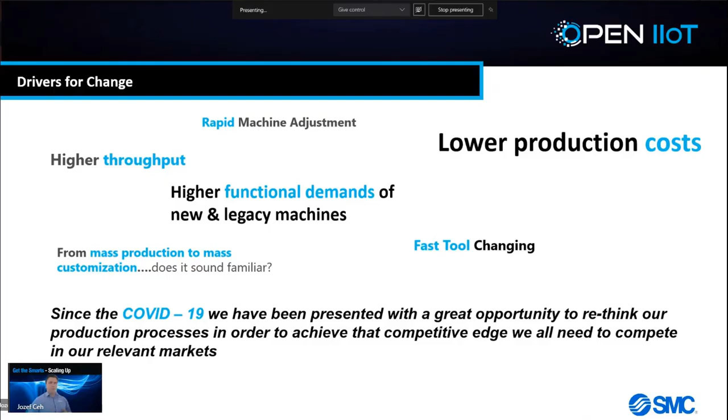So the possibilities of smart factories are almost endless, and that can be a wonderful thing, but it can also be cumbersome and almost harrowing for a lot of people, not knowing where to start and what part of the process to consider. When we don't have boundaries or a structure around a process like this, it's difficult to quantify.

Perhaps we can't quantify it from a technology perspective. We may not be able to quantify the financial investment, resources, or time invested. And we all know nobody likes to write open checks, especially not these days. But yes, it is possible to hold a factory in the palm of your hand and be able to retool the machinery at the push of a button.

But it's really important to understand that this is not the start of the process - this is the end result of the journey. We need to keep that in mind. There are many aspects along that journey, and many stops along the way, that get us to that point.

So moving across, in saying that, perhaps we've found enough reasons to start this journey. Perhaps we have already had enough reasons, or you may want to consider that now. But where do we start?

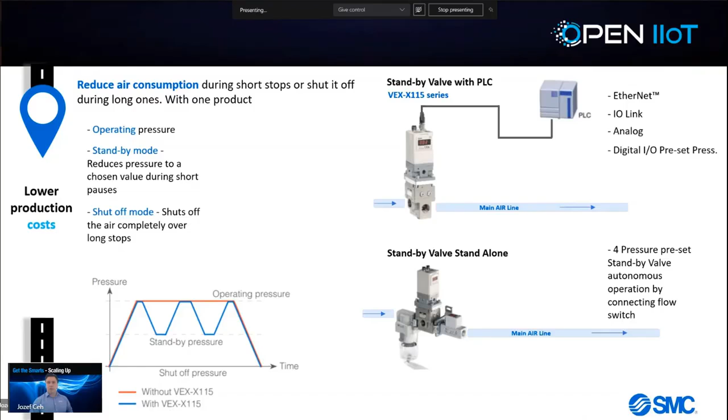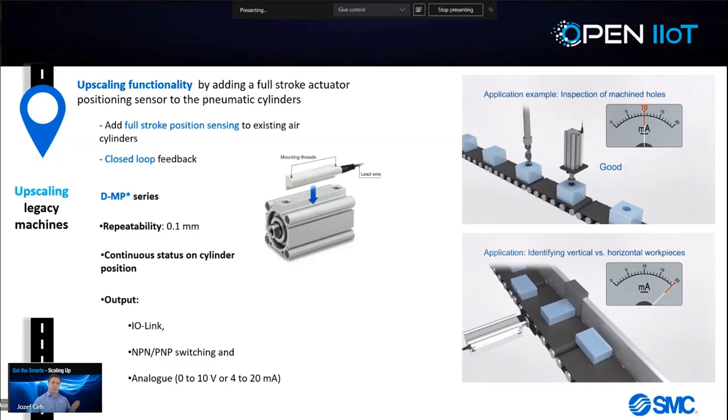Another solution takes the actuators even further. What if we added a higher degree of control to our cylinders and actuators, like controlling speed, force, and acceleration? In the previous example, all we know is where the actuator is. Well, with this, they can speed up the cycle time on the machine by not having the pneumatic cylinder go all the way back before starting the next part of the process, because we know it's safe to do so and it's out of the way. So we may be able to shave one or two seconds off the process.

Going to that next step up, we add further functionality by controlling speed, force, and position. We could do that in the same way, controlling the valve just as we control the cylinder, simply by flicking on-off switches, without adding further complexity to the machine, and still achieve a lot more. One option is electric cylinders, a simple product that we can apply almost immediately to upgrade part of the process.

This is where rapid machine adjustment comes in. We can repurpose our machines to accommodate multiple different products almost immediately without adding complexity to our PLC process. It may be a matter of replacing some simple actuators to add further functionality, storing step data within the driver itself and selecting through on-off switching, or perhaps we already have a network on the machine that we can integrate into. So, another option to explore.

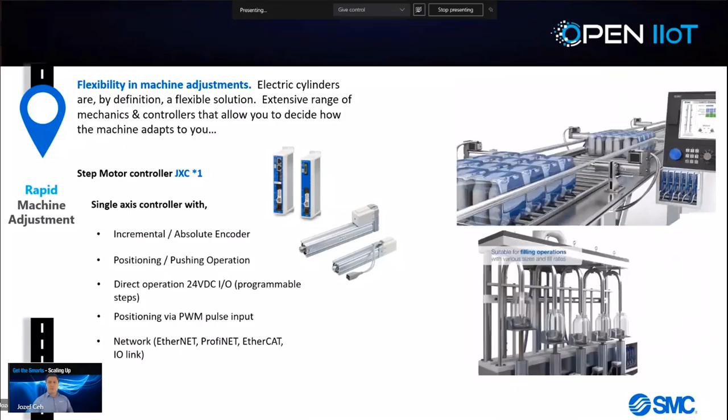Adjusting conveyors for multiple products, potentially filling systems where we can adjust for various size jars or shapes of a jar, viscosity of the fluid where we can use speed to adapt to the viscosity of the fluid and control the filling systems.

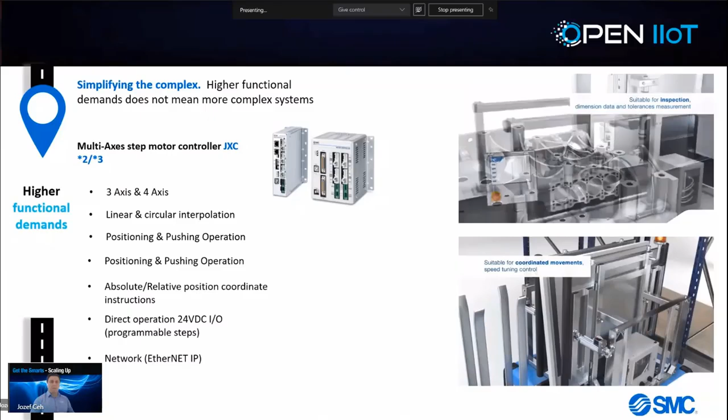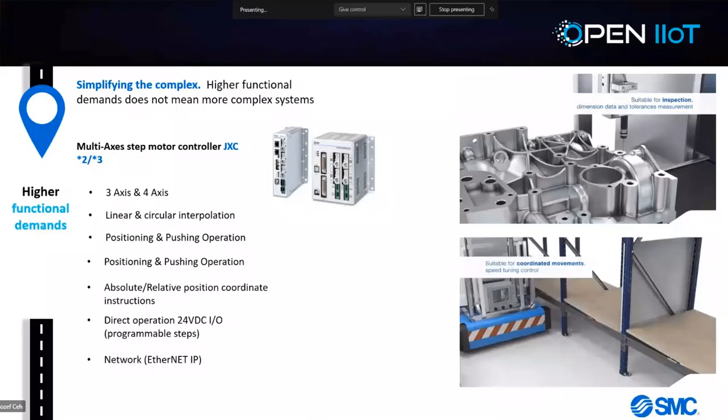We can go even further than that. Looking at it, we're still using basic principles and applying basic technology and controls, as in the previous examples. We can add further functionality to our machinery where we can coordinate some axes, where traditionally coordinating axes requires high-end PLCs or dedicated PLC motion cards and probably quite a lot of knowledge in programming as well.

Having a simple system like the JXC2 and 3 options, we can coordinate axes and have the smarts handled by the driver itself. We can still select that type of motion with a simple on-off switching output from a basic source - that could even be push buttons, or a relay output on a basic PLC, or we can integrate a network such as Ethernet IP or EtherCAT or others.

So coordinating axes, where can that come in quite handy? Well, it certainly comes in handy with palletizing applications, where it could be as simple as Cartesian axes or palletizing in a certain pattern.

It could be inspecting parts, like in the top right-hand corner, where what we need to do is a QA check or inspect with a laser sensor to ensure the parameters are correct on a machined part.

Or we can also apply glue to the interior of a car part that needs to go in an irregular pattern. These are very flexible solutions that are built in natively to a system like this, where it doesn't require any specific or high-end knowledge, and it allows for rapid deployment as well.

It could be even synchronizing 4 axes, as we see in the bottom right-hand corner, for autonomously transporting parts and shelving them where stability is required and an equal amount of force is required on 4 different corners, applied at the same time with the same movement.

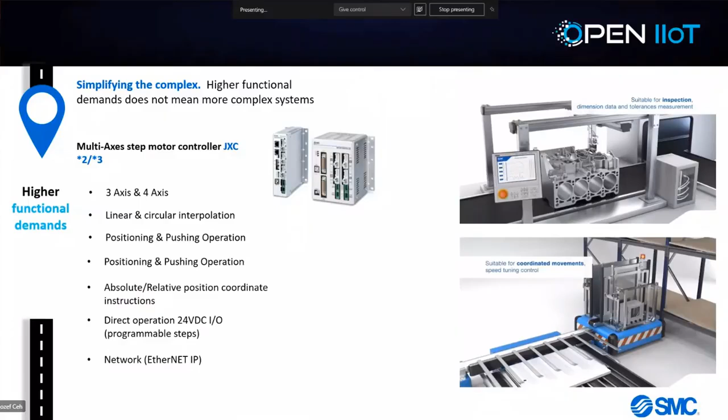Stepping across to another side of the factory, it's been estimated that a lot of downtime in robotics is usually caused by broken communication cables. We've all seen robots in operation, the multi-axis movements or quite complex movements where robots are deployed to perform, and they're deployed for that very reason. But perhaps if we could give them a lot more

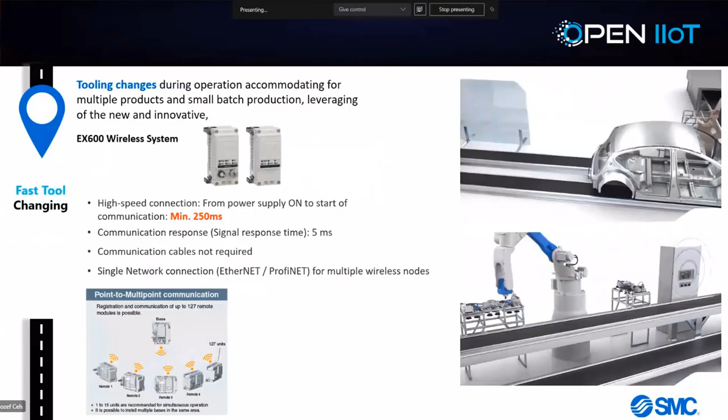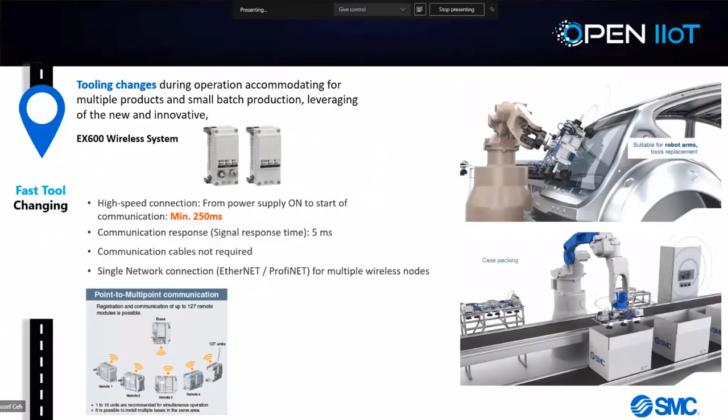freedom in movement by removing some communication wires - that's exactly what is available. We can reduce some downtime on robotics by putting in wireless communication I/O modules that can communicate to a master in a control cabinet, removing at least one extra wire of the communication line. What this could do is improve perhaps the speed of the packaging, or let us move in a direction we weren't able to move because we were tied to one specific wire.

What it also does is allow a single point of connection with the master module to a PLC that, for example, may have only one Ethernet or one ProfiNET connection available. We can set up multiple wireless subnetwork modules that correspond to the one master without adding further programming to the PLC.

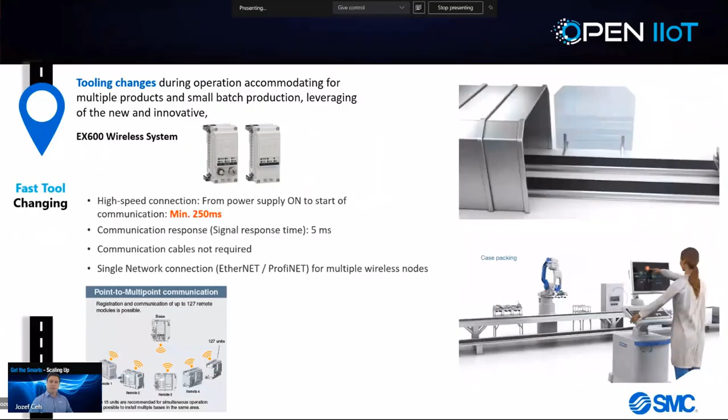Where that's particularly useful is also with tool changing. As we can see in both applications running on screen at the moment, often we need to change tooling to be able to handle different products in the same, or at that part of the, process.

Where that can happen quite quickly is by being able to have multiple wireless modules connected to tooling equipment. On power up and reconnection, approximately 250 milliseconds or even less at times it takes to power up, and it's back in full production and online and available.

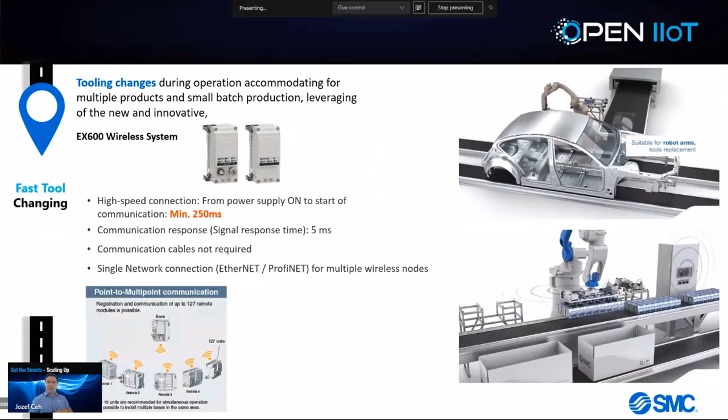So another way where we can add further flexibility to our factory and potentially reduce downtime in broken wires and diagnostics. So having said that, we've seen a few different applications where possibilities, we could open up almost immediate possibilities, and it didn't require anything specific or overly technically intensive or involved.

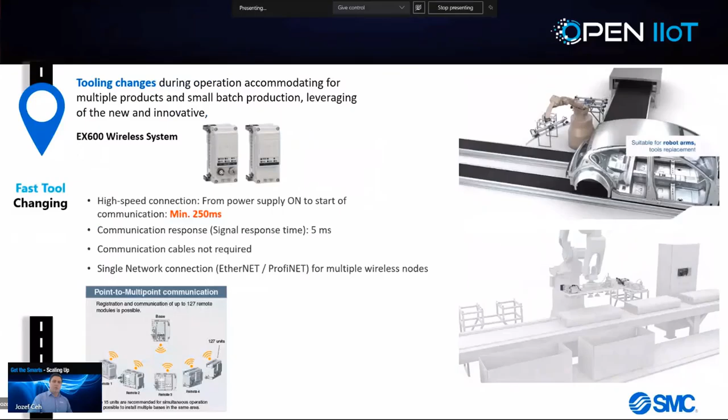So reviewing quickly on this slide, where to from here? What we started was building an infrastructure. We start on one part of the process or one section of the machine where we've taken one direction, whether that be to save compressed air or reduce compressed air usage by lowering pressure during standstill or standby, diverting that air to another section of the machine, which in turn stops the compressor kicking in continuously and having to run overtime.

Where we are looking at upgrading high-end functionality using simple electric cylinders with slightly more capable drivers that can perform what previously used to be quite complex tasks very simply at our end as well.

We can upgrade very simple air cylinders as well by adding smarts to that cylinder, like electronic full stroke sensors and also electronic regulators that can control the force of the cylinder very dynamically in coordination with the sensor. And we've also seen wireless systems that can remove wires and allow systems to move freely. Those systems are usually robotics or turntables, stretch wrapping systems, etc.

So where to from here, and what are the further benefits that we unlock? Having this type of equipment implemented, at this point, we haven't connected to anything other than the actual functional part of the process. Now, what we have achieved is an improvement in the process.

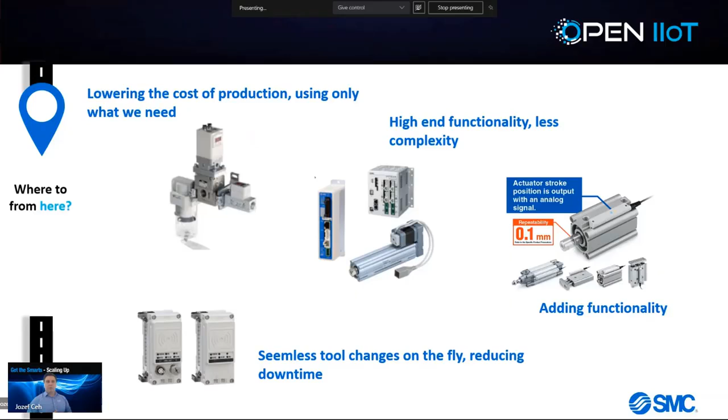So we don't want to stop here. Yes, we have made immediate improvements, and there are immediate instant rewards there that we can start applying, but we don't want to stop here on the journey. So what's the next stop?

Well, the next stop is to create a scalable platform. So once we start deploying these systems — these IO systems, whether that be sensors, actuators, or smartening up our legacy machines — what we want to do is start integrating into a common platform. Now, that common platform could be like an EX600 system, which helps to facilitate an ecosystem that grows with your automation requirements.

Now, flexible — which is why we refer to smart flexibilities — we can upgrade at any time. We can add a functional module to this system as the requirement does arise. So once we've preset all the infrastructure and the actuators and the IO system below that, we can start integrating.

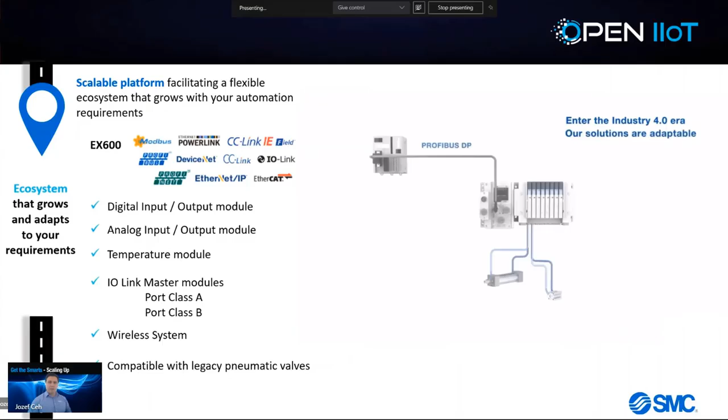We can start integrating via IO link to the system. We can upgrade a certain part if we're at that point with the budget, or the next round of upgrades allows for that type of implementation. Or we can simply continue by wiring it through an analog IO system or a digital system and find one output or one part of that system that can give us a little bit of diagnostics or feedback that might be critical to the system until we are ready to upgrade further.

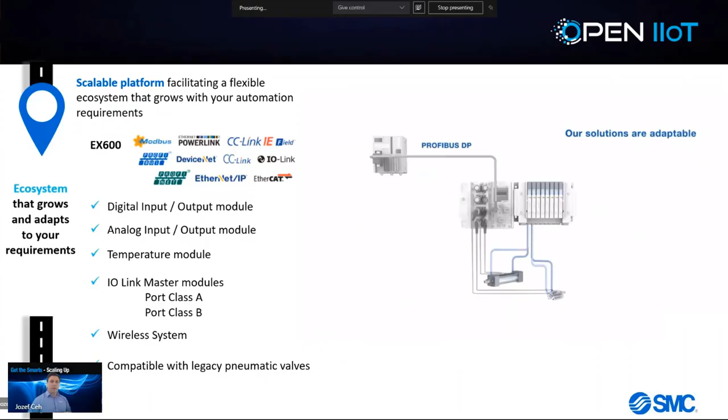So a lot of flexibility exists, and you can see by the vast amount of communication networks that a scalable platform like the EX600 can connect to as well. It does allow us to utilize the existing equipment that we've potentially diagnosed in our second step of digital assessment, to accommodate for that extra spare capacity that we have. So we don't have to replace everything on the machine.

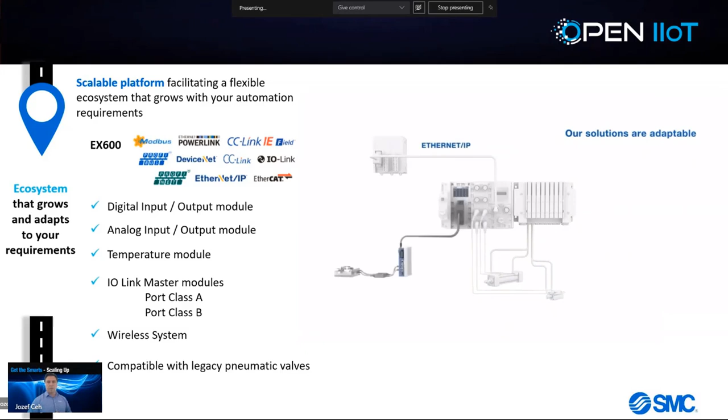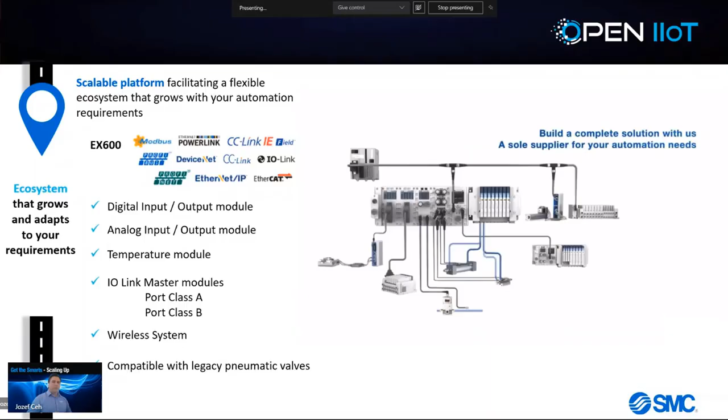Having said that, and starting to head down scalable systems as such, ultimately that's going to lead to the overview where we want to go, which is the gentleman holding the iPad, potentially from the top floor, being able to adjust his whole factory. So ultimately it leads to smart factories. And this is what smart factories look like.

When we start having interaction with multiple parts of that factory or multiple parts of the process, by being able to understand what's happening through streaming data, having full duplex communication - that means being able to send data to individual equipment right down to the sensor level, and being able to interrogate data from each sensor, actuator, or processor on that line - that starts giving us a lot more flexibility.

One of the great quotes I've seen is that being able to refer to real-time data, other than quarterly management reports, certainly makes a significant valuable insight to decision making. So having that data on hand right now certainly gives us a lot more ability to respond to a live system as such.

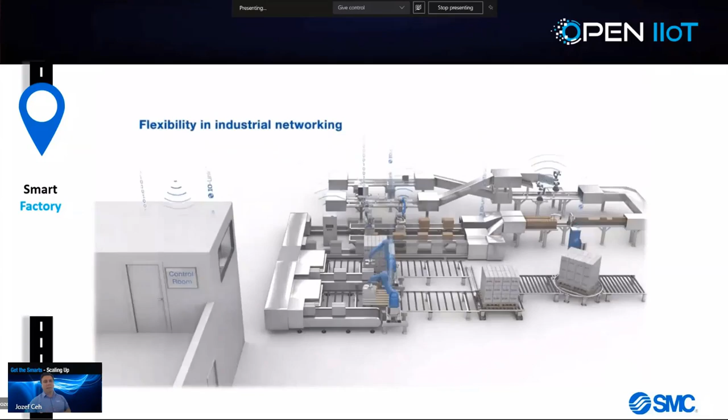So with that, we'll pretty much complete our journey on the next step. The summary and key points we've explored: start somewhere. We need to start somewhere. The key is to take small steps, make it achievable, within the budget, within our capability.

Follow the process, lay out the process into 4 steps in digitalization. Be clear on what we're trying to achieve, how we're going to do that, what we currently have, and who we have around us to support - the project management team, the timelines and budgets - and let's get a little bit better every single day. So ultimately, that's the key points in summary.

So the last slide, we're finishing, and we'll go to our Q&A. I'm not sure how we're going for time, Nick.

Yeah, I think you've entertained people and they're sticking around. We haven't had anyone dropping off, which is good. So I'd like to thank you, Joe, for your informative presentation. I'm sure we're all taking something away from this. We do have a few questions. I'm getting a lot of feedback. I don't know why.

So what I'm going to do is read these questions out to you. I'm also going to send them to your device, so you can look at that too. The first question - and some of these might have been answered already - is: in your initial assessment, you mentioned technology and enablers. What is the more important driver for change? Is it practical or cultural?

Well, I think that's a wonderful question, and there is certainly an element of being able to embrace change as well, so both are important. To answer that simply, it's important to have people on board, and it's important to have the culture instilled that it's okay to change, and okay to move forward in ways that enable us to do better, to be better in terms of what we are doing and how we are doing it, to be more sustainable, which ultimately reaps benefits for the business itself.